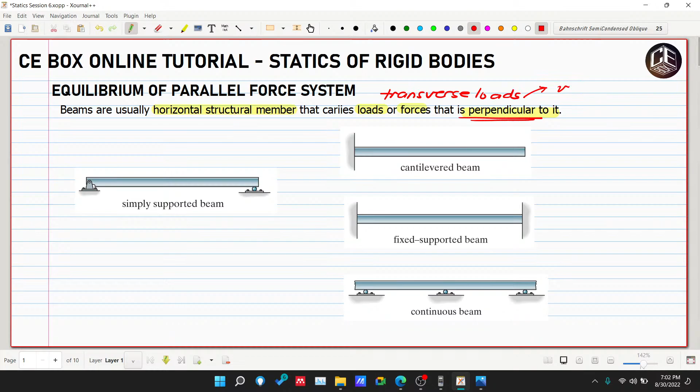Okay, let's start. Equilibrium of parallel force systems. Beams are usually horizontal structural members that carry loads or forces perpendicular to it, which we call transverse loads. So when we say transverse load, those loads are perpendicular to the longitudinal axis of our beam. Let's say our beam is usually horizontal, so if that's horizontal, it means our transverse loads are vertical loads, because that's what's perpendicular to the horizontal. Let's say this is our beam and its longitudinal axis is this, our X, so this is the X-axis.

Let's say we have loadings here: 10 kilonewton, then here we have 5 kilonewton, and this is our support A and B. Since support A is a hinge, we have two support reactions: this is the vertical reaction and this is the horizontal reaction. Since this is a roller support, we have a perpendicular reaction to its surface. Since the surface is horizontal, our support reaction here is vertical, so this is RB.

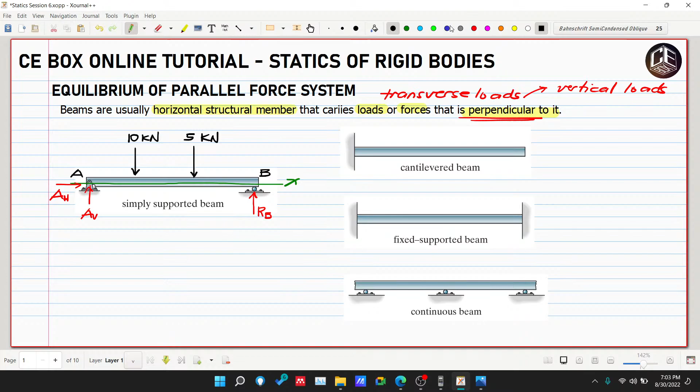So how does this equilibrium of parallel force system work? First, in terms of loadings, the effect of the loadings - since these two forces have a resultant that is vertical, the resultant is 15 kilonewton.

Itong 15 kilonewton na resultant o yung effects sa beam ay sasaluhin ng AV at RB. Sila yung sasalo niyan. Ibig sabihin, in terms of summation of forces vertical, magiging equivalent yan sa 0. Okay? So, 0 yung effects ng ating mga forces kasi sasaluhin ng ating support. Now, yun lang ba? Hindi.

Since meron tayong mga distances dito, let's say this is distance 2 meters, this is 3 meters, tapos sabihin natin this is another 3 meters. So mangyari ngayon, since meron mga distances itong mga forces na to at a certain point, o from a certain point, let's say sa A, magkakaroon sila ng moment effect. Diba? So ngayon, since meron tayong moment effect dito due to these loads, sino ang sasalo nun?

Okay, so since mag-moment tayo sa A, ang sasalo o ang magre-resist sa moment effect na yon at A ay yung RB, since ang ating RB ay iikot ng counterclockwise at A. So since meron magre-resist sa moment effect ng mga forces na to at A, therefore we can say that summation at moment at A is equivalent to 0. Kaya nga, equilibrium. Balance. Okay, di ba?

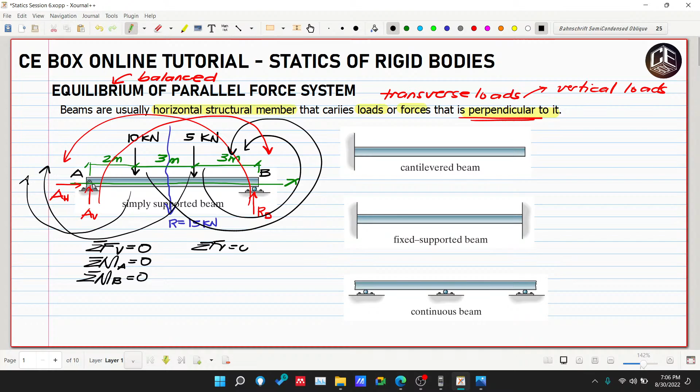Ibig sabihin, dalawa lang ang ginagamit natin kapag equilibrium of parallel force system: yung summation of forces vertical is equivalent to 0, and summation of moment is equivalent to 0 at any point.

So this type of beam is what we call the simply supported beam. Tinatawag natin siyang simply supported beam once na ang support ng ating beam ay isang pin saka isang roller. So that is simply supported beam.

Ito naman yung isa pang type of beam which is cantilevered beam. So kapag cantilevered, naka-overhang yung buong member. Okay? Ayan. Then nakakonekta siya dito sa isang fixed support. So paano to? Kapag mayroon tayong loadings dito, sabihin natin P.

Then let's say this is Q. So sino ang magsusupport niyan in terms of vertical? Yung vertical reaction dito sa support na to. Paano naman kung meron tayong horizontal force dito? Let's say Y, ayan, o C na lang. So sino magre-resist nun? Yung horizontal reaction at this support.

Tapos, since meron silang mga distances, let's say this is distance X, and this is distance B o Y. So since meron silang distances, magkikreate din sila ng moment effect at this support. So sino magre-resist sa moment effect ng mga forces na to? Yung moment reaction dito. Kaya nga, yung ating cantilevered beam is dapat fixed.

Imagine, okay? Imagine na pin lang yan, o hinge. Tapos meron tayong mga vertical forces dito, tapos meron pa tayong horizontal. Okay, kaya nga niyang i-resist yung vertical and horizontal.

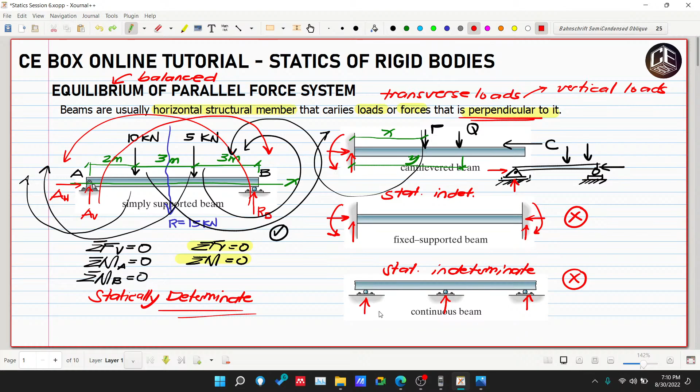Kapag statically determinate structures, ibig sabihin, enough na yung ating summation of forces vertical, summation of force horizontal, and summation of moment is equivalent to 0 para ma-solve yung mga unknown forces natin. Okay? So, I hope naintindihan nyo yun.

So, para mag-solve na tayo ng problems. This is our problem number 1. Determine the reactions at A and B for the given simply supported beam. So, simply supported beam to, ibig sabihin we have pin and roller.

So, ito, since this is a pin support, we have vertical reaction at A, let's say sabihin natin AV, and this is AH. Tapos ito naman ay roller support, therefore we have RB. Remember, ang ating reaction sa roller is perpendicular dapat sa kanyang surface. So, ito, perpendicular naman sa horizontal.

So, tama ito, no? Ngayon, yung ating 50 kN is an inclined force, so therefore we must convert it or resolve it into components.

Yan. So, alam na alam natin to, di ba? Under to saan? Sa topic natin na forces and components. Kung first time po ninyo sa ating live tutorial at hindi po ninyo alam ang topic na forces and components, pwede po kayong magpunta sa aming playlist, Statics of Rigid Bodies. Under po dito sa first playlist namin na Statics of Rigid Bodies, Chapter 1 and 2, Forces and Components, para matutunan po ninyo kung paano mag-resolve ng components.

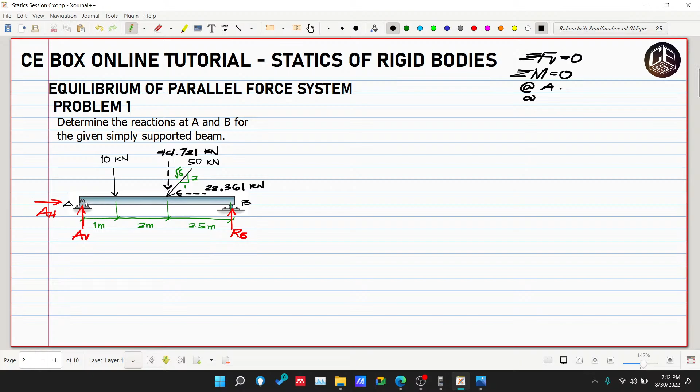Kapag ba ginamit natin yung summation of forces vertical is equivalent to 0, ilan yung unknown? At kapag ba nag-moment tayo, okay, at A, ilan yung unknown? At B, ilan yung unknown? So, check natin. So, dito, sa vertical, dalawang unknown natin, diba? Yung ating AV and RB.

Tapos kapag naman nag-moment tayo sa A, ang iikot lamang sa kanya na unknown is yung RB, so ibig sabihin, one unknown. Kapag naman nag-moment tayo sa B, ang iikot sa kanya is yung AV, diba? So, one unknown. Isa pa pala.

Since meron tayo ditong horizontal effect ng ating forces, ibig sabihin, merong sasaluhin yung ating A in terms of horizontal reaction. So, summation of forces horizontal is equivalent to 0. Ilan yung unknown natin? Isa lang.

So, by summation of forces horizontal is equivalent to 0. To the right is positive. Ang ating AH is to the right. Tapos, ang ating 22.361 ay to the left, so negative 22.361 kilonewton is equivalent to 0. Kaya, ang ating AH is equivalent to 22.361 kilonewton. Remember, yung tinuro namin sa equilibrium, kapag nag-positive yung magnitude, meaning, tama yung ating assumed direction for that certain force. So, since ang ating AH is positive, therefore, tama na siya ay to the right. Ang ating AH is directed to the right.

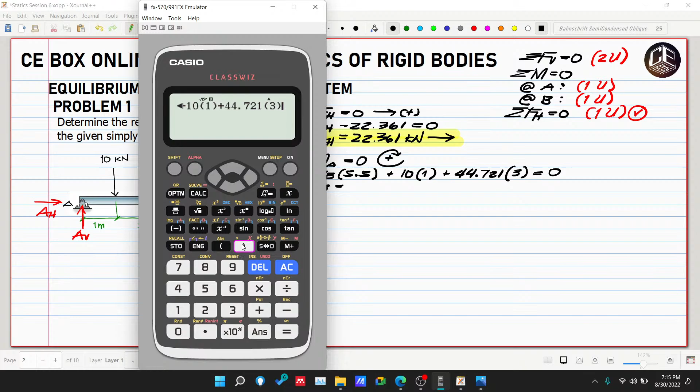So, ngayon, makukuha natin ang RB. So, RB is negative multiplied by 5.5 plus 10 multiplied by 1 plus 44.721 multiplied by 3 is equivalent to 0. So 26.211 kilonewton. So since positive ulit yung nakuha nating sagot sa RB, therefore, tama rin yung ating assumption na siya ay directed upward.

Okay, next. Okay, so okay na tayo sa moment at A. So check natin ulit yung summation of forces vertical kung ilan yung unknown. Okay, for this at this moment, ang unknown na lamang natin is yung AV. Therefore, pwede na natin gamitin yung summation of forces vertical.

So, summation of force vertical is equivalent to 0. Upward is positive, so AV is upward. Therefore, it is positive plus RB na 26.211 then minus 10 kilonewton minus 44.721 is equivalent to 0.

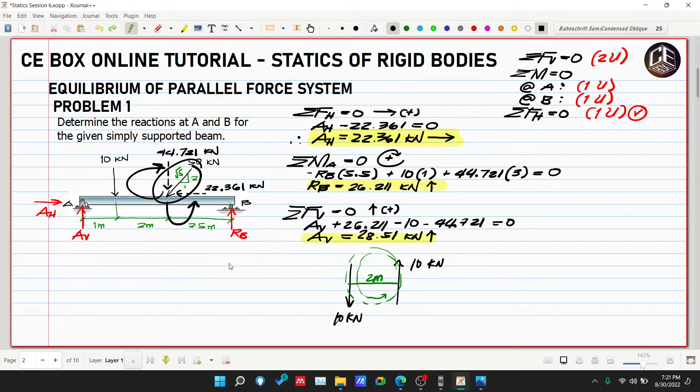As simple as that. Pero ang tanong, paano kapag mayroon tayong ibang type of forces na tinatawag nating distributed loads? Okay, ayan. So una, kapag uniformly distributed load, kailangan nating kapag kasi distributed load na yung given sa ating beam, ang kailangan kasi natin is malaman yung location ng ating resultant. Ayan. So dito, ipapakita na lang namin yung shortcut kung nasaan yung location ng mga resultant natin magmula dun sa kung saan sila nag-start or nag-end ng distribution.

Una, kapag uniformly distributed load, ibig sabihin pantay-pantay yung height ng ating loadings. Ang loadings natin ay 10 kN per meter. Ibig sabihin, ang resultant niya ay nasa gitna. Tama naman, nasa gitna. Kasi pantay-pantay yung bigat niya. So if this is 5 meters, ang location ng ating resultant dito is L over 2, or 5 over 2 in this case.

Ngayon, paano naman kapag non-uniformly distributed load? Kapag non-uniformly distributed load, it's either triangular or trapezoidal. Ang tanong, nasaan sila? So, sa triangular, kung mag-i-start tayo rito sa vertex, ang kanyang location is nasa 2/3 of L.

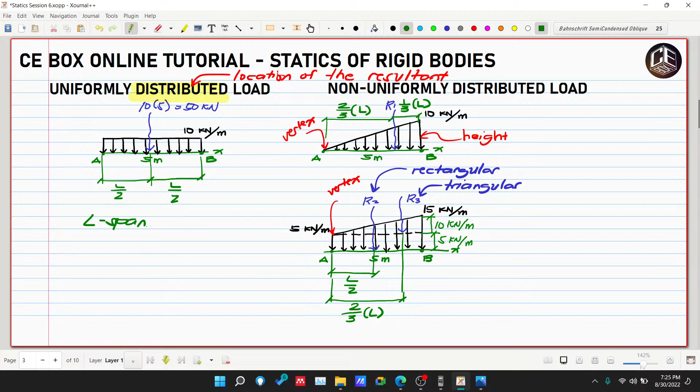So, this is L over 2 kasi sa rectangular siya. Para naman sa R3, nag-start tayo sa vertex. Ito ang vertex niya. Kung nag-start tayo sa vertex, ibig sabihin, ito ay 2/3 of L. Take note, ang L ay ang span o length kung saan ang loadings ay distributed o nakadistribute. So sa case na ito, ang ating L ay 5 meters, at sa lahat ng case, 5 meters din. Kung saan lamang sila nakadistribute, yun ang L.

Balikan natin paano makukuha ang resultant kapag ganitong case. Ang resultant ng distributed load ay equivalent sa area ng loadings. Kung rectangular, height multiplied by base. Kung triangular, 1/2 of height multiplied by base. Para sa rectangle, base times height. Para sa triangle, 1/2 base times height.

Nakakatakot ba kapag distributed load na? Medyo, pero actually hindi naman siya nakakatakot. Ang kinakatakutan ng lahat ay ang trapezoidal load—kapag trapezoidal load na, ayaw na ng lahat. Gusto kasi ng mga bata ay puro point load, tapos simple vertical and horizontal lang, ayaw pa nila ng inclined. Sa inclined pa lang, medyo nakakatalo na. Paano pa kapag distributed load? So simple lang ang distributed load: kunin mo ang resultant gamit ang area ng loading, pangalawa, kunin mo ang location nila.

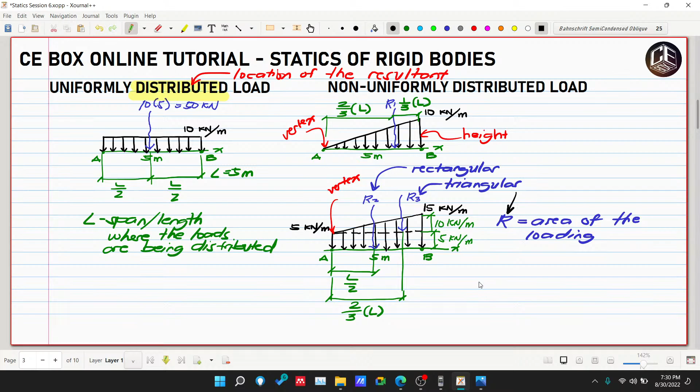Ito na po ang ating problem number 2: Determine the reactions at A and B for the given simply supported beam. Wala tayong problema dito, simple supported beam lang, kaso ang problema natin ay ang ating loading ay trapezoidal load. Huwag kayong mag-problema—ang gagawin lang natin ay hahatiin natin ang trapezoidal load into rectangular and triangular load. After that, we will solve for the resultant, at after that, we will solve for the location.

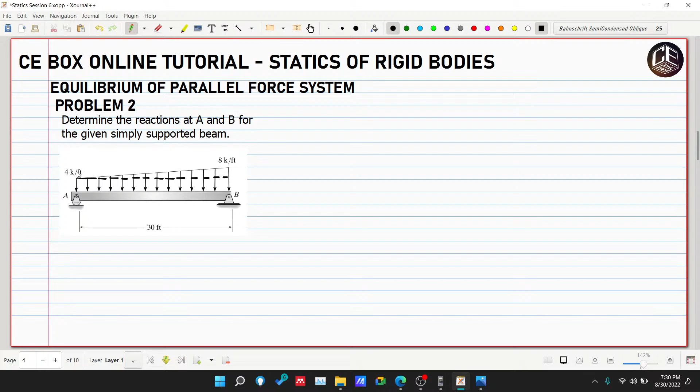Check natin: ito ang ating trapezoidal load, hatiin natin sa rectangular and triangular. Kung ang height nito ay 4 kips, at ang height nito ay 8 kips, hatiin natin.

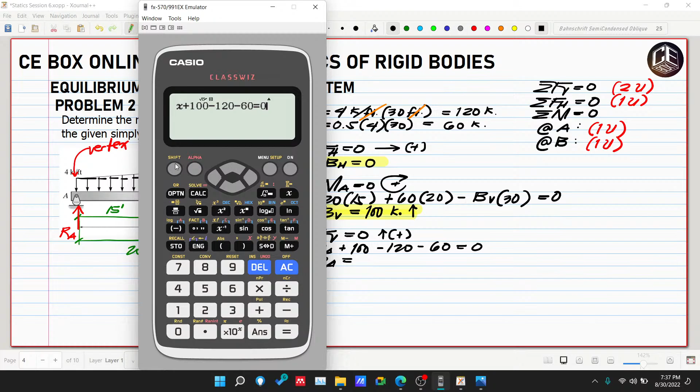Next, we can solve for RA by using summation of forces vertical since that's the only unknown. So, summation of forces vertical equals 0. Upward is positive, so RA is positive, plus BV which is 100, minus R1 which is 120, minus R2 which is 60 kips, equals 0. So RA is 80 kips.

Okay? Since our RA is positive, therefore our assumed direction is correct again. Sir, how does it become negative?

Try to practice this. Try making RA downward. If downward, what would be our solution? Negative RA plus 100 minus 120 minus 60 equals 0. What comes out? Negative 80 kips. Since that's negative, it means our assumption that RA is downward is wrong.

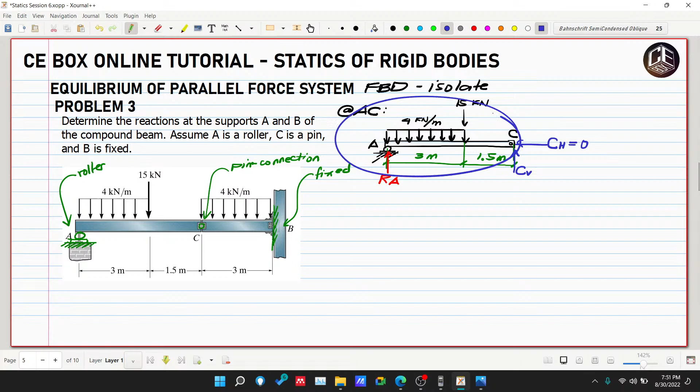So, by observation, we can easily determine CH. This is equivalent to 0. Bakit? Wala naman siyang i-resist dito na horizontal applied force. So, 0 na ang CH.

Ngayon, isosolve natin ang RA and CV. So try natin magbilang ng unknown ulit. Kahit di nyo naman gawin to, tingnan na lang natin. Okay, in terms of vertical, ilan ang unknown? Dalawa. In terms of horizontal, isa lang ang unknown, CH, which is equivalent to 0. In terms of summation of moment, at A, iikot is CB, okay tayo don. At C, iikot is RA, so okay tayo don. Kahit anong unahin nyo, okay lang.

So try natin mag-moment at C, or sa A na lang, mas madali, is equivalent to 0, clockwise is positive. Bakit madali? Kasi yung resultant ng 4 kilonewton is andito, malapit lang sa A, diba? So ilan ang resultant ng ating 4? This is 1/2 of 3, this is 1.5. Tapos anong resultant? Ang resultant niya, 4 multiplied by 3, so 12. So this is 12 kilonewton.

So ang CV natin, counterclockwise, so negative CV multiplied by 3 plus 1.5, that is 4.5. Then ang 12 kilonewton iikot ng clockwise, that is 12 multiplied by 1.5. Then 15 kilonewton multiplied by 3 is equivalent to 0. Therefore, ang ating CV is equivalent to: negative CV multiplied by 4.5 plus 12 multiplied by 1.5 plus 15 multiplied by 3 is equivalent to 0.

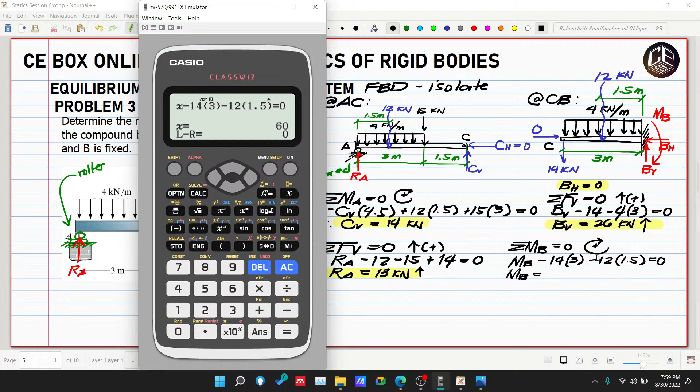So MB minus 14 multiplied by 3 minus 12 multiplied by 1.5 is equivalent to 0. So MB equals 60 kilonewton meter. That is moment. Remember, moment is force multiplied by distance.

Our force is in kilonewtons, our distance is in meters, so that is kilonewton meter. Or if our force is in pounds and our distance is in feet, then this is pound foot.

Since our MB came out positive, our assumed rotation for MB is correct. So therefore, it will rotate clockwise.

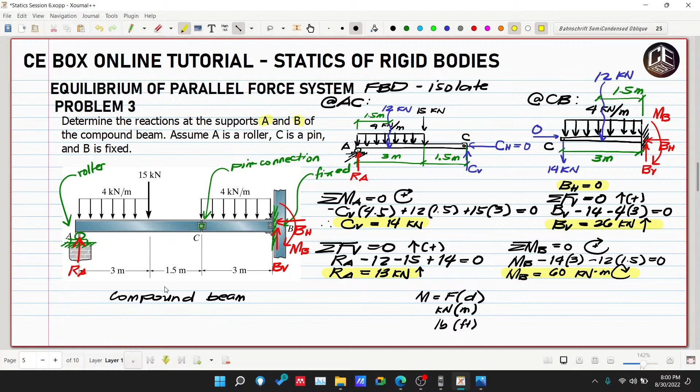And now, our last topic for chapter 3. This is our last topic for chapter 3: the equilibrium of non-concurrent force system.

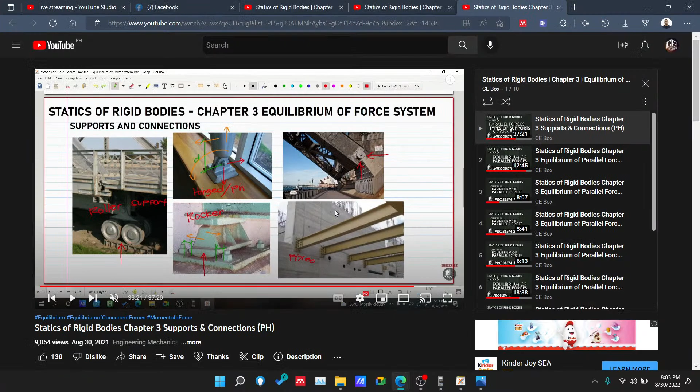You can go to the introduction of our discussion on force system, types of force system. Before you go to higher lessons or higher chapters, you need to understand the earlier chapters first. The question a student asked about the meaning of parallel force system is still under Statics of Rigid Bodies chapter 1, where we discussed the different types of force system. Once you understand parallel force system in that chapter, you'll understand the following chapters much better. So please watch our full discussion on the principles of statics and types of force system. We discussed it there, okay?

Yes, as John Kenneth Lim said, you just need to memorize all the types of supports and connections, then the reactions—support reaction, connection reaction—then identify them based on the given figures. Yes, identify what equations to use first so we can solve the unknown forces. Sir, where can we get your file with the solution?

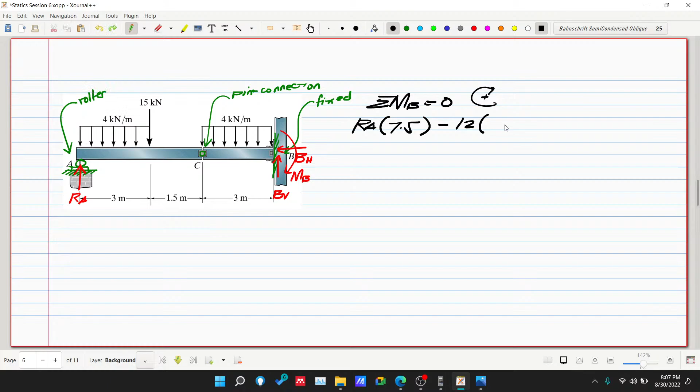So now let's try taking summation of moment at B equal to 0, clockwise positive. RA will rotate, multiplied by 7.5. Then minus, this is 12, multiplied by 7.5, minus 1.5. Then this is 12 too, so 12, multiplied by 1.5. Then 15, multiplied by 4.5. Is that enough?

Is this correct? This is wrong. Why? Future engineer, you forgot about MB. We still have an unknown moment at B. So, therefore, our solution should include plus moment at B equal to 0.

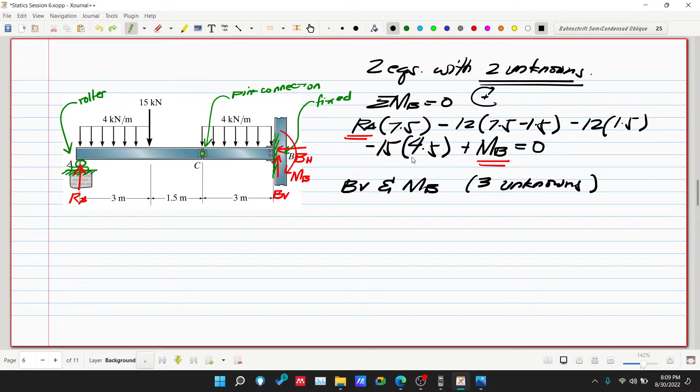Sir, why did we include MB in the moment at B, when the moment at B is right there at point B? It is not a force, it is a moment, okay? So since it's already a moment, it has a moment effect here, unlike BV. The BV becomes zero at B because its distance is equivalent to 0 at B. So there's zero moment effect for BV and BH at point B. That's the reason. Since MB has no moment arm because it's already a moment itself, we include it in the solution. So that's the answer.

Okay, I think that's enough. So we can move on to equilibrium of non-concurrent force systems.

The best examples of non-concurrent force systems are trusses, frames, and pin-connected structures, which are analyzed as non-concurrent force systems. As we know, for non-concurrent force systems, the equations we use are summation of force vertical, horizontal, and summation of moment, same as parallel force systems. So in problem number 1, as we said, this is a non-concurrent force system, which means we'll use summation of forces vertical, horizontal, and summation of moment.

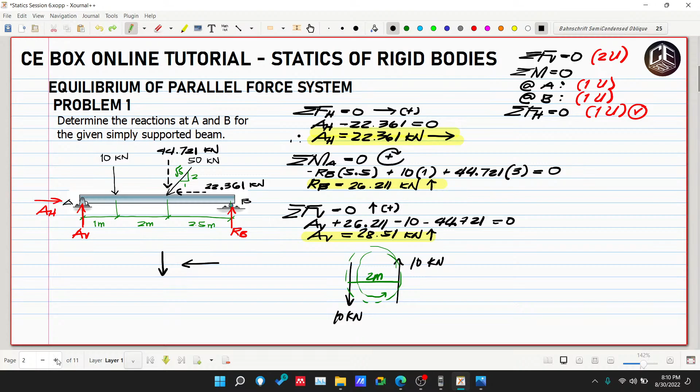So paano yun? Ganun din ang concept niya sa non-concurrent force system. Meron tayong reaction dito, at dito meron din. Kung meron man tayong mga forces, yung mga forces na yan in terms of vertical, sasaluhin sila ng reaction. Kung meron man pong horizontal, sasaluhin rin siya ng horizontal. Kung meron man silang moment effect, meron din pong sasalo sa kanya. Kung nag-moment siya sa A, ang sasalo niyan is itong reaction na to. Ngayon, kung nag-moment siya dito, ang sasalo niyan is yung reaction na to. So ganun din po siya.

Kaya yung ating equation in terms of vertical, horizontal, and summation of moment ay dapat na 0. So this is an example of truss. Ito naman, example po ito ng pin-connected structure. Yung kanina kasi, pin-connected beams lang po. Ito naman, talagang pin-connected structure na siya. Ito naman, frames or frame. So try po natin mag-solve.

So problem number 1, determine the components of reaction at the fixed support A. Neglect the thickness of the beam. Sabi niya, ano daw siya? Fixed support, so fixed support yan. Kung fixed support yan, ibig sabihin meron tayong vertical AV, meron tayong horizontal AH, and meron tayong moment MA.

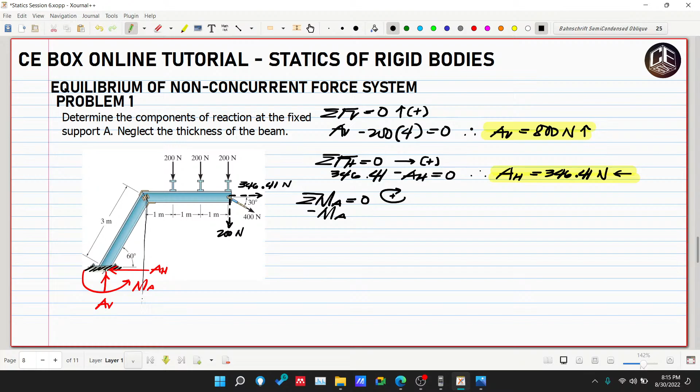So we need to convert 3 meters into horizontal distance, tapos vertical distance. So let's say ang vertical natin is A and horizontal is B. Simple na lang to, simple SOH CAH TOA. Sine of 60 degrees is equivalent to A over hypotenuse na 3. Tapos cosine of 60 degrees is equivalent to B over hypotenuse na 3. So 3 sine of 60, that's 2.598 meters para sa A. Tama ba? Sine? Tama. So ito naman, cosine, this is 1.5.

Yan, so pwede tayo mag-moment. Okay so lahat ng 200 clockwise. So plus 200, then yung unang 200 ang kanyang moment arm is 1.5 plus 1, that is 2.5. Tapos yung isang 200 is 1.5 plus 2, so 3.5. Yung isang 200 is tatlong 1, then isang 1.5, that is 4.5. Tapos dalawa yung may 4.5, ito saka ito, so 2.

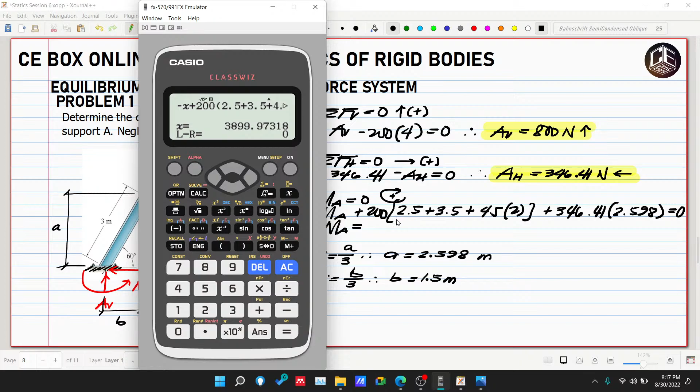Yan, tapos ito, yung 346.41, iikot ng clockwise, so that is positive 346.41 multiplied by moment arm na A, which is 2.598 meters, is equivalent to 0. Negative MA plus 200 multiplied by 2.5 plus 3.5 plus 4.5 multiplied by 2, then plus 346.41 multiplied by 2.598, is equivalent to 0. So MA is 3899.97 Newton meter. Since positive yung nakuha natin sa MA, therefore tama yung ating assumption sa rotation ng MA. It will rotate counterclockwise.

Okay, next problem number 2. Ayan, medyo may konting twist diba? Ito kasi medyo madali pa, fixed support lang yan eh, isa lang siya, madali lang siya. Ito kasi marami ng support, pero observe pa rin natin.

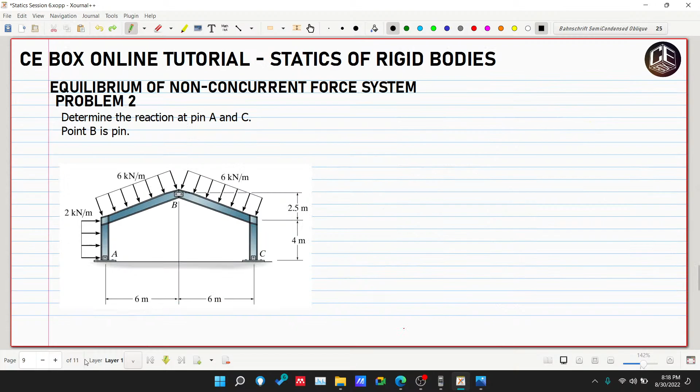Ang sabi rito, determine the reaction at pin A and C. Point B is pin. So ang tawag po rito, since pin to, sinabi niya, di ba, pin yan. Ibig sabihin ang ating structure is tinatawag natin as pin-connected structure. Kagaya ng ating pin-connected beams, yung compound beam, ito. Kagaya ng compound beam natin, pwede natin i-isolate yung mga members natin para mas madaling i-analyze. Ganon din ang gagawin natin dito. Hahati natin yung member. Ito kasi fix.

Ito rin, fixed connected, diba? So since fixed connected yan, pwede natin i-consider itong member na to as 1, tapos itong member na to as also 1 member. Okay, para mas madalian tayo, convert na nga muna natin itong lahat sa resultant forces.

Ito kasi perpendicular, no? Ito rin perpendicular. So ganyan yung mga natin. Tapos, ilan ba to? 2.5, 6 meters. So kailangan natin makuha yung length nito. Since hypotenuse yun, so 2.5 squared plus 6 squared, so this is 6.5.

So 6.5 yung buo, 6.5 meters. So ibig sabihin, yung kanyang resultant is 6 multiplied by 6.5, 39. So this is 39 kilonewton. This is also 39 kilonewton, kasi pantay naman 2.5 saka 6.

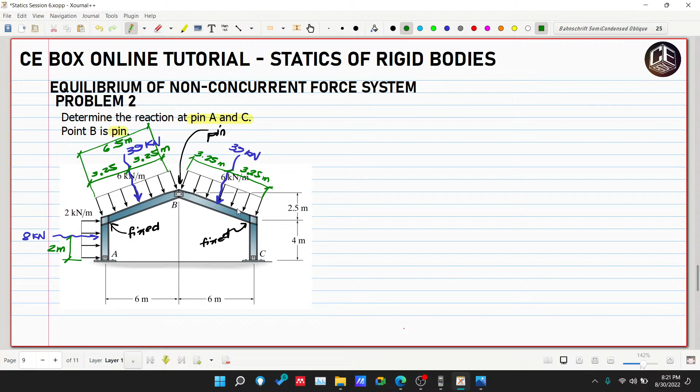Actually, itong mga ganito talaga kasing problem is pang major ng structural engineering. Ayan, kaya nga pag ini-invite kami as guest speaker, share lang namin, share lang talaga. Kapag nagtutok kami ng ini-invite kami as guest speaker, tapos yung mga topic na binibigay sa amin is parang future career ng mga CE, ang talagang dinidiscuss namin is yung different field of civil engineering. Kasi ang nangyayari, karaniwan, ang alam lang talaga ng mga students at ang pinaghihirapan lang talaga ng students na ma-master at maipasa is structural engineering, which is the most common major, okay? The most common major in civil engineering sa halos lahat ng universities sa Pilipinas. Talagang structural engineering, kaya nga ganito tayo kahirap na mag-analyze ng mga structure kasi ang mga major po ninyo sa school ninyo is structural engineering. Ngayon, yung sinasabi po kanina nung nasa comment sa TikTok, na kapag dating nyo naman daw sa actual, hindi naman natin magamit to.

Kasi, ang actual na tinutukoy po noon, nung user po na yon is construction, which is totoo rin naman talaga. Pero dapat may alam pa rin naman talaga tayo sa structural members, hindi ba? Sa mga structural supports and connections. Pero yung analysis na ganito talaga, hindi na natin talaga siya masyadong magagamit sa construction kasi nga, ang construction is under sa field ng construction and management, which is hindi naman karaniwang major natin sa undergrad kasi ang major natin talaga karaniwan is structural engineering. So yun yung pinupush yata talaga ng CHED saka PRC na talagang dapat magkaroon na ng kada major yung mga civil engineering students pagpasok nila sa college, diba? Sa engineering. So in that way, kapag alam na talaga nila yung major, doon na talaga sila magpo-focus. Diba? Kunwari, sa construction management na yung major niya, siguro medyo light na lang yung hirap ng structural engineering sa kanila. Kasi ang major talaga nila is to, diba? To supervise, decision making, diba? Mga ganong usapin ba? Yun.

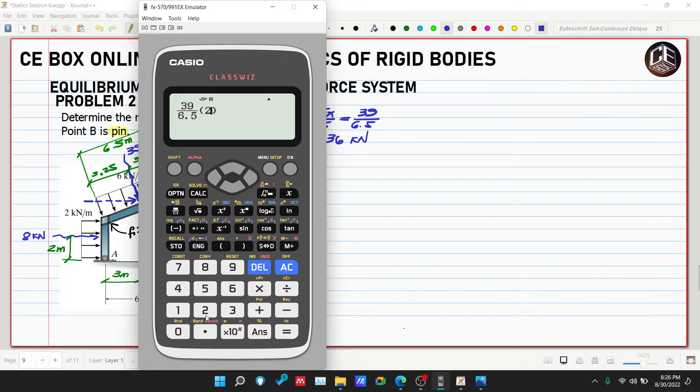So by ratio proportion, masusolve natin ang Fx and Fy. So 39 over 6.5 multiplied by 6 para sa Fy, this is 36 kilonewton. Then para naman sa Fx, multiplied by 2.5, 15 kilonewton. Ayan. So ngayon, pwede na tayong mag-solve.

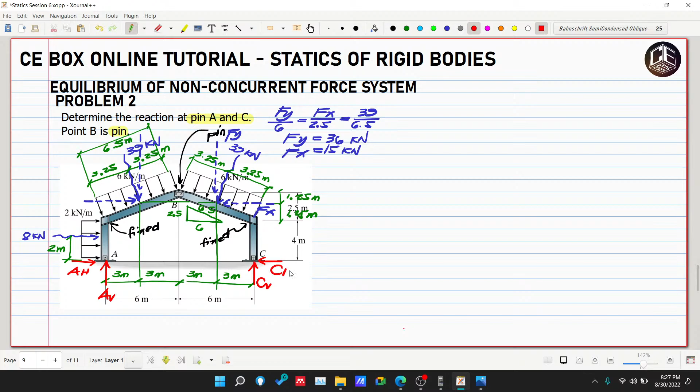Check natin to. So this is AV and this is AH. Tapos ito naman is CV and this is CH. Bilangan tayo. By summation of forces vertical is equivalent to 0. Summation of forces horizontal is equivalent to 0. Summation of moment is equivalent to 0.

We have two unknown forces for vertical. We have two unknown forces for horizontal, CH and AH. At moment at A, ilan ang unknown natin? At moment at C, ilan din? Isa lang, diba? Tig-isa. Yung AV sa C, yung CV naman sa A.

So pwede na tayong mag-moment. By summation of moment at A is equivalent to 0, clockwise is positive. Ang ikot ng CV is counterclockwise, so negative CV, multiplied by moment arm na 12 meters. Then yung 8 kilonewton, iikot ng clockwise. So plus 8 kilonewton multiplied by 2 meters. Tapos itong mga to, okay?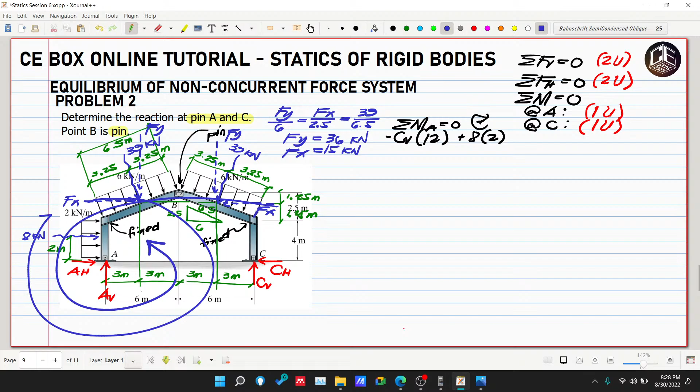Pagmasdan niyo mabuti, yung Fx natin ito, tapos ito yung Fy, di ba? Yung Fx nito, iikot ng counterclockwise. Itong Fx na to, iikot ng clockwise. Tapos parehas sila ng magnitude, parehas din sila ng moment arm. So magka-cancel out na lang sila. So hayaan na natin yan.

Pero yung Fy, iikot ito ng clockwise, ito rin, iikot ng clockwise. So hindi natin sila pwedeng i-cancel out, okay? So Fy, baba natin to. Ang ikot nila is clockwise, no? So plus Fy, which is 36, multiplied by moment arm, 3 para dun sa isa, tapos yung isa naman is 9. 3, 3, 3, so 9 is equivalent to 0.

So masasolve natin ang CV. Negative CV multiplied by 12 plus 8 multiplied by 2.

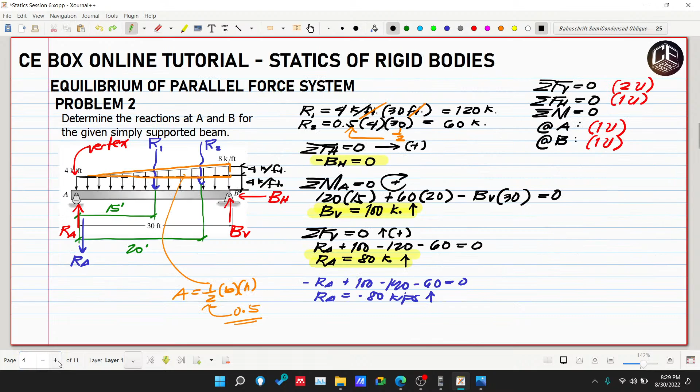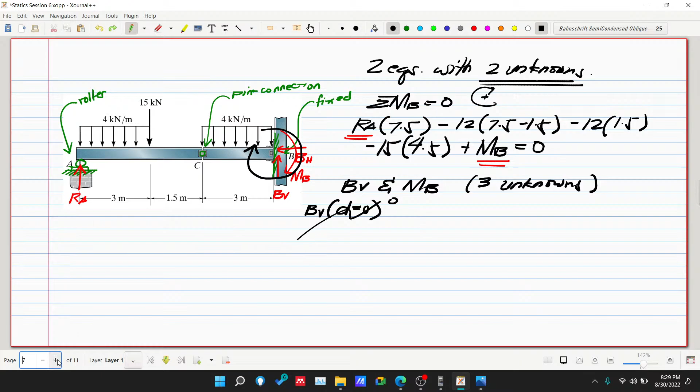By the way, ang ginagamit ko na FBD, okay, yung ating FBD is yung whole structure, itong whole structure. Kasi dito sa ating problem number 3, ang ginawa natin, FBD at AC and CB. Pero dito, dito kasi sa whole structure, wala tayong masasolve, di ba? Pero dito kasi, may masasolve tayo sa whole structure.

So ilan to? Plus 36 multiplied by 3 plus 9 is equivalent to 0. Ayan, so 37.333. Anong unit? Kilonewton. So positive ang nakuha natin. Therefore, ang ating CV ay tama in terms of direction.

Kaya directed upward. Next, by AV naman, by summation of forces vertical is equivalent to 0. Upward is positive. So AV, then minus Fy, that is 36, multiplied by 2 kasi dalawang Fy, then plus CV na 37.333 is equivalent to 0. So AV minus 36 multiplied by 2 plus 37.333 is equivalent to 0. Ayan, so 34.667.

So positive na naman ang nakuha natin sa AV. So it is directed, tama yung ating assumption, kaya siya ay directed upward. Next.

Okay, tapos na natin masolve ang CV and AV. Pwede naman natin masolve ang horizontal? Hindi, kasi considering the whole structure, ganun pa rin. Ang CH natin ay dalawa pa rin. Ang ating horizontal forces ay dalawa pa rin. So ano gagawin natin? Ayan.

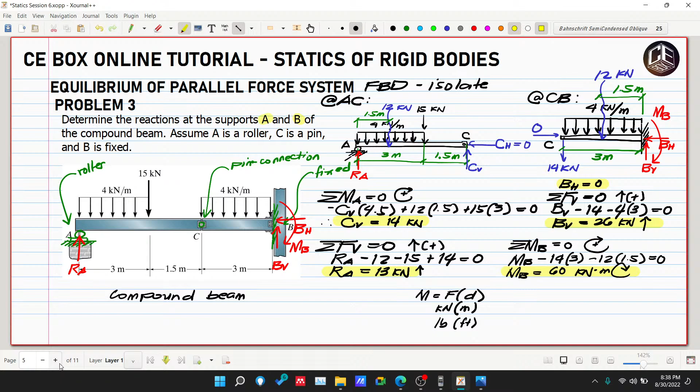Ayan, okay. So ano po yung pag-uusapan natin by tomorrow? Kung kakayanin po namin mag-live tomorrow, no? Ang pag-uusapan po natin tomorrow is Chapter 4, Structural Analysis na po tayo. Doon na po tayo magdi-discuss ng truss analysis, yung method of section, method of joints, tapos yung frame analysis na kung saan ang gagamitin po natin ay method of members. Actually, dito sa ating problem number 3, naggawa na rin po tayo, gumamit na rin po talaga tayo ng tinatawag natin na method of member. Pero pagdating kasi sa frame, mas iba pa yung method of members na yon. Masakit siya sa ulo actually. Pero syempre, i-discuss namin siya ng mas parang mas sa level ng student, sa level ng pangunawa ng student, para mas madali siyang unawain ng mga estudyante.

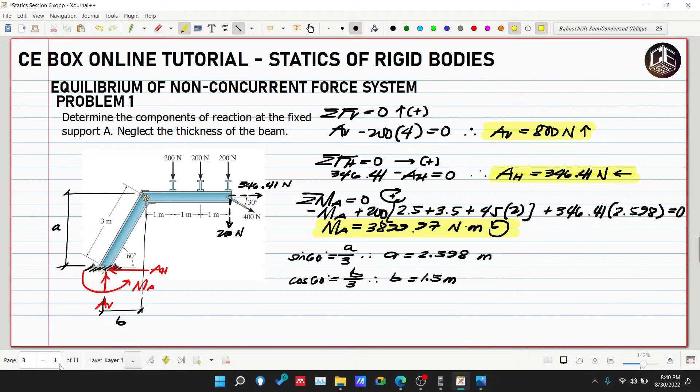Thank you po. Hindi po ba magro-rotate clockwise yung 8? Tignan natin, clockwise... yes, clockwise naman po yata yung nalagay natin, no? Ito po, clockwise po siya.

Ito, clockwise sa A, no? Clockwise rin po dito sa... Ay, sorry, counterclockwise pala sa B. Sorry, nakatingin ako sa A eh, kaya clockwise yung tingin ko kanina. Sorry, so this should be negative. Dapat negative.

Negative pala siya. So kung negative yan, negative AH multiplied by 6.5, no? So AH to. Tapos, negative 39 multiplied by 3.25, then minus 8. Then multiplied by, ang moment arm po niya, hindi po pala 2, sorry, this is 2 meters plus 2.5, so 4.5.

Lutang na po ako, sorry. Medyo nag-extend na po tayo ng time. So, negative 25.04 po pala siya, no? Negative 25.04.

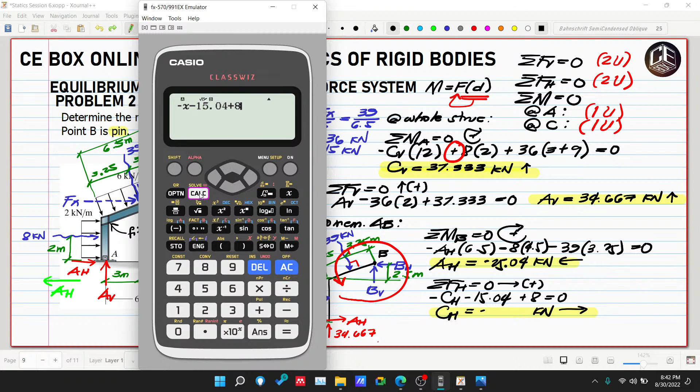Okay, so negative 25.04. So this is negative 15.04, tama po ba? Sa whole structure, no? So, 8, tapos AH, ganito na siya, no? Tama? Yun lang. Okay, so negative CH minus 15.04 plus 8 is equivalent to 0. Okay, so 7.04, negative 7.04. Yan, so thank you po sa correction.

Hindi po ba counterclockwise yung 8? Sir, magaling ka na talaga sa math dati pa? Hindi po, hate ko po yung math. Sabihin ko sa inyo, hate ko po talaga ang math.

Ano pong oras bukas? Same pa rin po, 7 p.m. Lagi naman po kami 7 p.m. nag-live. Hindi po counterclock, ayan, nakorek na siguro natin sa 8 na. Nagkamali na ako eh, anyway, at least nakorek natin siya. Nakatingin ako sa 8, bakit? Ba't kaya ako nakatingin sa 8? Anyway, ayan, so yun po.